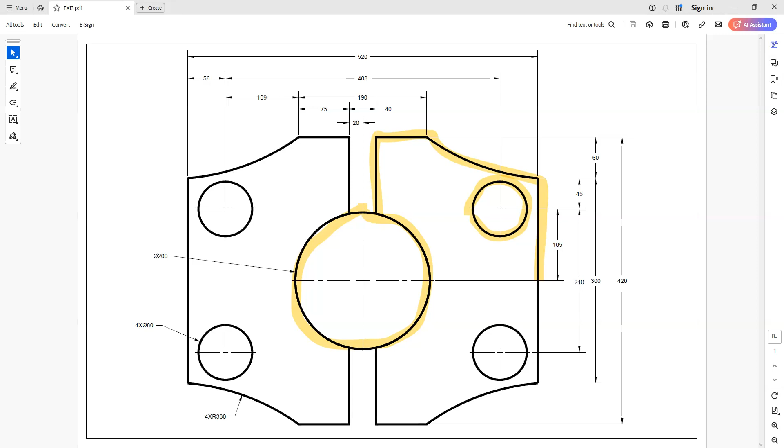Alright, so let's go ahead and look at this drawing, right? We're going to mainly take a look at these objects here. So what I'm going to do is create just these objects here. And if you look at this main circle in the middle here, that's going to be the point that I'm going to use to make everything symmetric around, right? So I'm going to create this big circle first, followed by just these little shapes here on the side. Before I get started on that part, let's look at some numbers and make sure that everything makes sense.

So the first thing I need to figure out is how long this line is. If we're looking here, and remember that this is symmetric, that number is sitting at 75, right? So that line is going to be 75 long. Next thing I need to figure out is how far it is to get from here to here, right? We've got to do a little bit of math on figuring this out.

We see the distance from that point on the opposite side all the way to this circle is 109, right? So we'll take our 109 dimension, and then to get from here to that edge, we can also see that we have a 56. All right, so if we add both of those numbers together, just some simple math here, that should be 165, right? All right, so I figured that part out. Next, I need to know how far it is to go down here. That's an easy number, right? It's already located for us.

I'm also going to need to locate where I'm going to place this circle. We see that that is at 60, and then we have a 45 going down to here, right? So if we add both of those numbers together, we get a 105. So 105 is going to be that distance that I need to come down, and sorry, I'm trying to draw this with a mouse here, but I need to create 105, right? That's going to be my total distance from this point here all the way down to here.

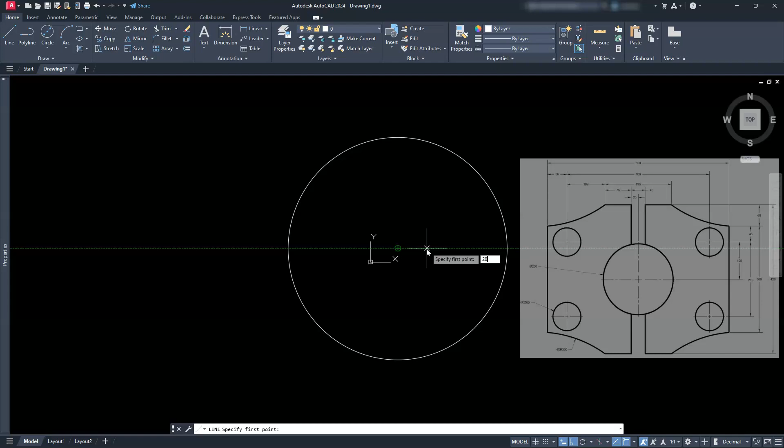All right, the next thing I need to do is create a line. And what I'm going to do is touch the center of this circle, right? And then when I see the center mark there, I'm just going to touch it. And then I'm going to drag this direction, and when I get the green tracking off of it, I'm going to type in that distance that I need, and it's going to be 20. So I'm 20 away from that.

Now I can go up. Now this distance is going to be half of the overall distance that I need. That overall distance is 420. So I'm going to type in 210. Let's go ahead and pan down a little bit. And next we need to go this direction. So here are the numbers that I figured out beforehand. So going this direction was 75.

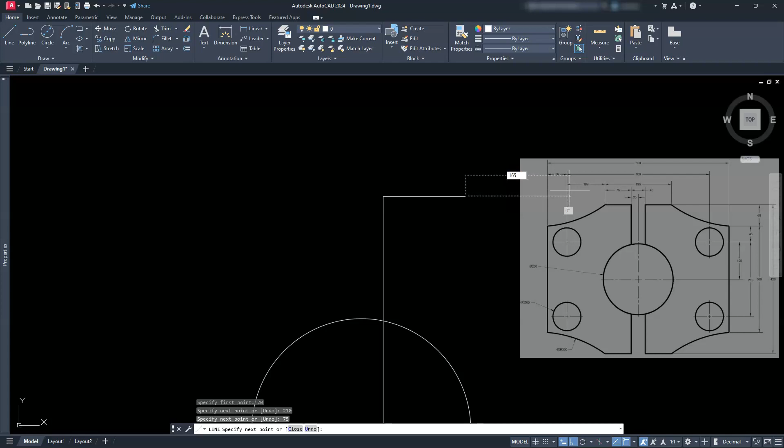Now what I'm going to do next is I'm just going to draw these numbers in as kind of skeletons, right? So I know that I need to go this direction, and we calculated that number before. That was the 109 plus the 56, right? So that number was 165. So I'm just going to type in 165. Then I'm going to go down. That first distance that we figured out, that was our 60, right?

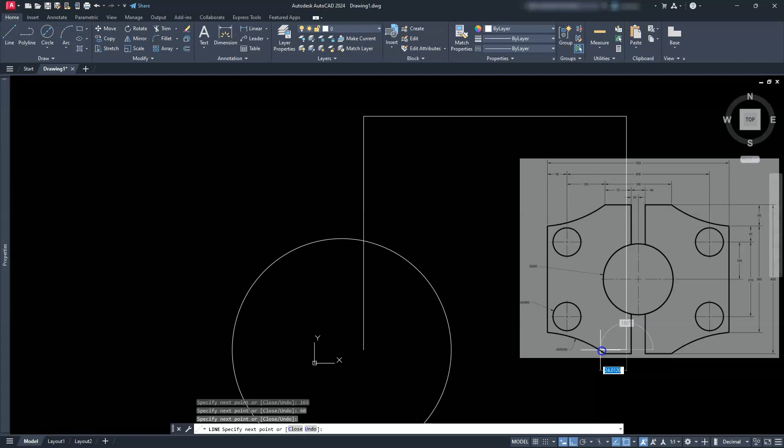And then I need to figure out how far it is to go all the way down. And I'm just going to go down to the center of this circle by touching the quadrant. And then I'll track off of it this direction. All right, let's go ahead and hit the escape button. And then we're going to go ahead and delete these two lines, right? So we're going to go ahead and delete that.

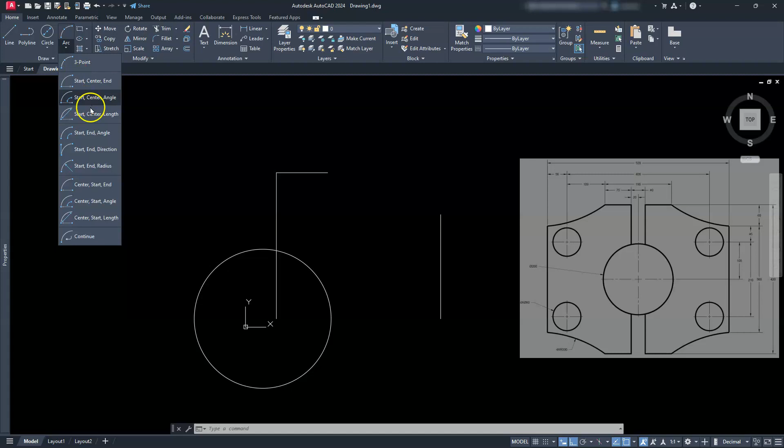Next, what I need to do is I need to go ahead and create an arc. So I need an arc going this direction. I know where it starts, I know where it ends, and I also know the radius. So that's the stuff that I know off the top of my head. So let's go to an arc. And then the one that I'm going to look for is going to be the start, the end, and the radius, right? So let's go ahead and select this arc.

Now remember that AutoCAD likes to create things in counterclockwise, meaning that if you pick the points in a counterclockwise, it'll put your arc on the right side. So I'm going to start here. This is going to be my start. This will be my end. Kind of get a preview of it by moving your cursor away, and then I'll type in the radius. The radius of this circle, or arc in this case, is going to be 330. Go ahead and hit enter, and now I've created that arc.

Next thing I need to do is go ahead and locate this circle. So remember that this circle is coming from this endpoint over 109, and then it goes down that 45 plus the 60, which we calculated was the 105.

So to help me out, I'm just going to move the UCS by selecting the UCS here, and then placing it right on this endpoint. Now I essentially just moved the 0, 0 location. Let's go ahead and escape out of that. I'm going to go to circle, center diameter.

And now I'm going to type in the coordinates. I need to go this direction, 109. So I'm going to type in 109 for the X component, comma, and then I need to go down. Remember, that's going to be our 60 plus our 45, which is 105. Enter. And I meant to go in a negative direction. So let me go ahead and do that one again.

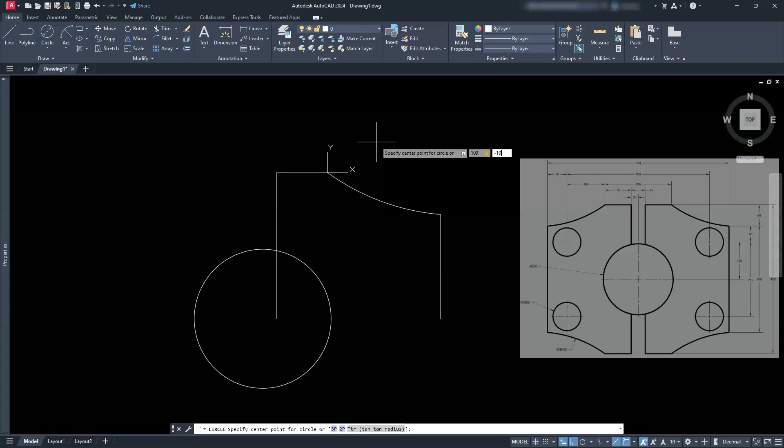Let's go ahead and escape. Let's go to circle, center diameter. I'm going to type in the X component, which is 109, comma, and then I need to go down. So that's going to be my negative value of 105. And then I'll go ahead and type in the diameter of that circle, which in this case should be 60. All right. So now we have everything that we need to create the rest of these, right?

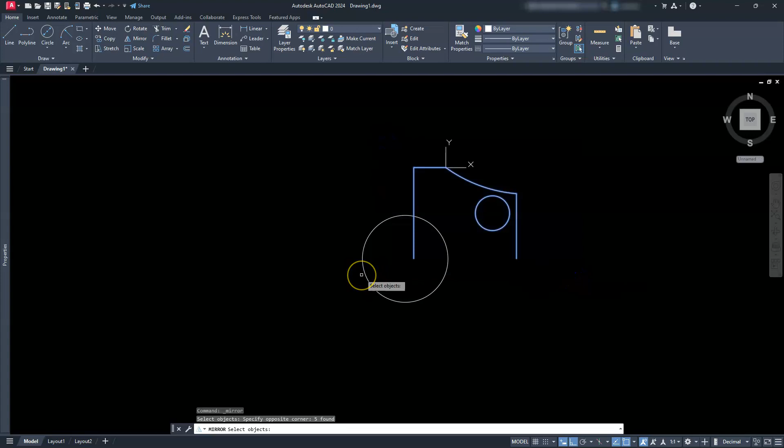So let's use the mirror command. Let's go to mirror. I'm just going to put a window around the stuff that I want to mirror. It's going to be this. Go ahead and hit enter after you're done selecting. And then just select these two endpoints. So I'm going to select that endpoint to this endpoint. And then hit enter.

I'm going to go back to the mirror command. Put a window around all of this. Go ahead and hit enter. I'm going to select this center. And then I'm going to go up. Do a left click and hit enter. All right. Let's go ahead and put our UCS back in the right location. So I'm going to go to UCS and put it back at the WCS.

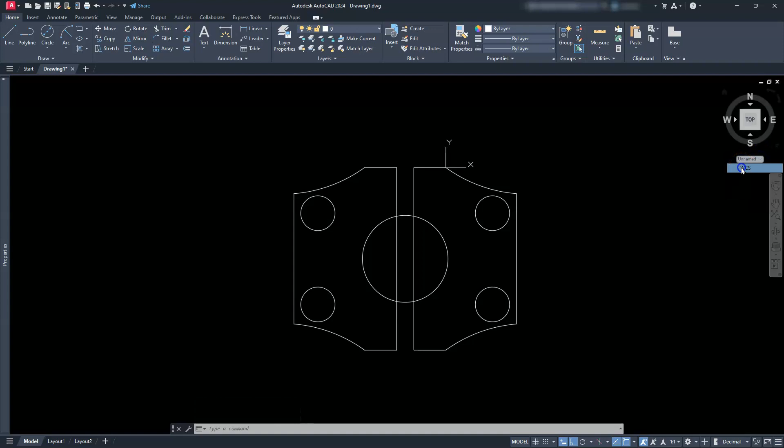And then I'm just going to trim off these components, right? So let's go to trim. And then just trim off these extra lines that are going through. Now here's one of those super useful commands. You can see that these two lines are broken up, right? You've got two different ways you can tackle this. The first way is to select them and then use the join command, and the join command is located with the two arrows facing each other.

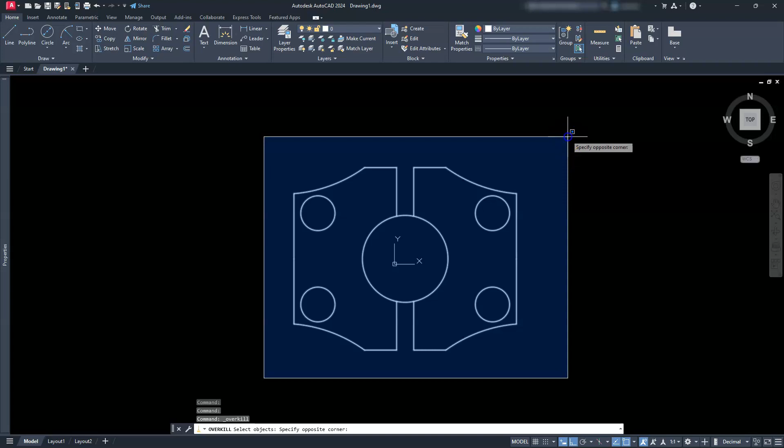So that's located here. But instead of using the join command, I'm going to show you one that's going to be a lot more effective for you. Let's go ahead and escape out of this. And then we're going to use the overkill command, which looks like a broom here. So go ahead and select the overkill command. And then it's going to ask me to select the objects. So just go ahead and put a window around these objects. Go ahead and hit enter. And then it should bring up a dialog box.

In this dialog box, it's basically telling you things that you want to ignore and things of that nature. Now, the only time I recommend not using the overkill command is if you're using donuts. But in this case, this is going to be totally fine for us. It has some combine co-linear components and other things of that nature. And if you've got some overlapping parts, overkill is a really useful command. All right, I'm just going to go ahead and hit OK.

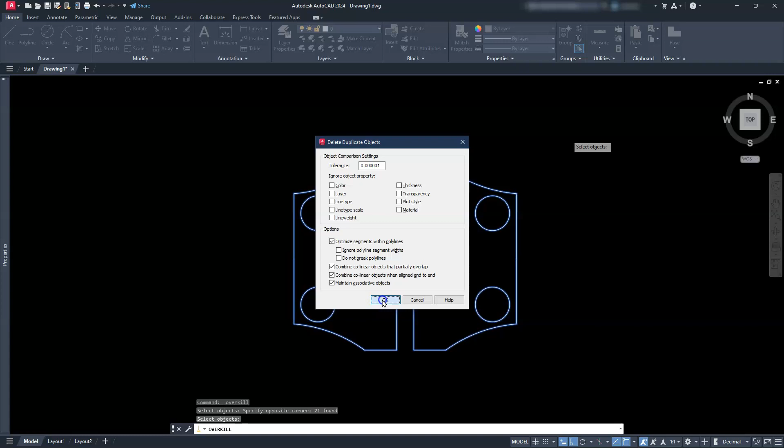And then I'll check these lines again, right? So both of these lines now are continuous. So the overkill command is really useful at cleaning up your drawing. I'd probably recommend doing it at the end of most of your drawings, all right? And that should be all for this one.